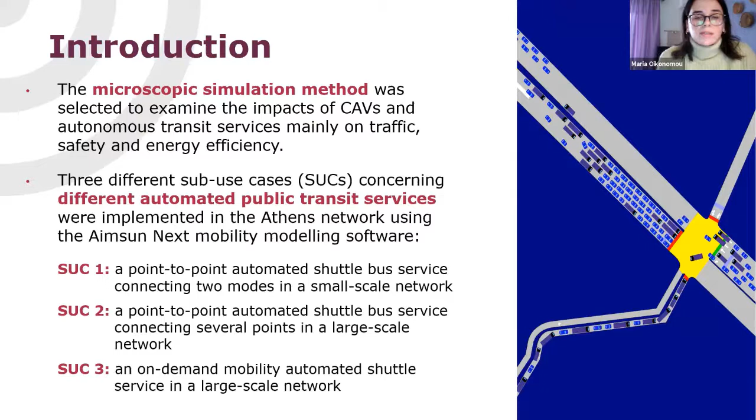The last one was an on-demand mobility automated shuttle service operating in a large-scale network. These sub-use cases were complemented to the existing public transport.

The first network on the right side is the small-scale network, used for the first sub-use case, the point-to-point automated shuttle service. It included approximately 60 centroids, consisted of approximately 150 nodes and 350 road segments.

The second network was the large-scale network, used for the second and third sub-use case. It included approximately 300 centroids and consisted of 1,000 nodes and 2,500 road segments. Regarding the simulated scenarios, for the first sub-use case, a baseline scenario was simulated, which was the no transit service operation scenario.

Also, mixed traffic conditions during peak hour was tested, as well as the existence of a dedicated lane for the service during peak hour.

Also, mixed traffic conditions during peak hour while an incident occurred on the shuttle bus route was simulated for this sub-use case. Regarding the off-peak hour conditions, mixed traffic conditions, as well as the existence of a dedicated lane for the shuttle bus service, were also investigated.

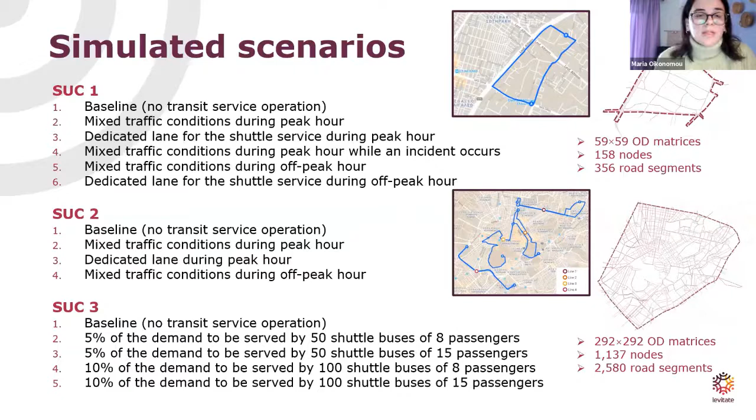Some additional microsimulation specifications were that two main driving profiles were simulated for modeling connected and autonomous vehicles. The first one is the first generation, that is a cautious driving profile. The second is the second generation, that is an aggressive driving profile.

Also, the autonomous shuttle buses for the three services were first generation of connected and autonomous vehicles. Regarding the implementation of them, different market penetration rate scenarios were simulated and are presented in the table on the right side. These scenarios are 8, and the market penetration rate is increased by 20%.

The first one included 100% human-driven vehicles, and the last one 100% of second generation connected autonomous vehicles. Also, the second generation was introduced when the first generation reached 40%.

Regarding the microscopic simulation results, for each impact, a graph was extracted for each simulated scenario for both peak and off-peak hour. Here we have the traffic-related impacts and environmental impacts.

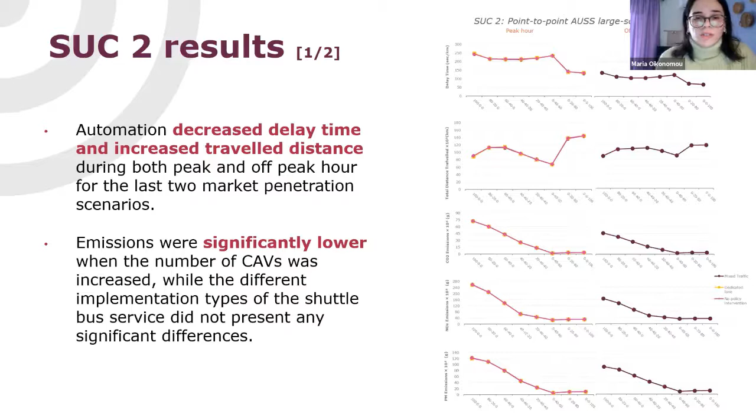Again, traffic emissions were significantly lower for all scenarios, while the different implementations of the service did not present any significant differences. The corresponding crash rate graph showed that none of the scenarios predicted an increase in crash rates, even at low market penetration rate scenarios.

Compared to the baseline, both peak hour scenarios showed the same trend in crash rates. And for the off-peak hour scenario that showed the fewer driven kilometers, the crash rate was higher at all market penetration rates.

Regarding the last sub-use case, the on-demand shuttle bus service, the implementation of the service led to decreased delay times and did not show any significant differences in total distance traveled. Traffic emissions were again significantly lower when the market penetration rates were high, and the different implementation types of the service did not present any significant differences.

Crash rates were reduced for all market penetration rates, and the addition of the service resulted in higher predicted crash rates than the baseline scenario.

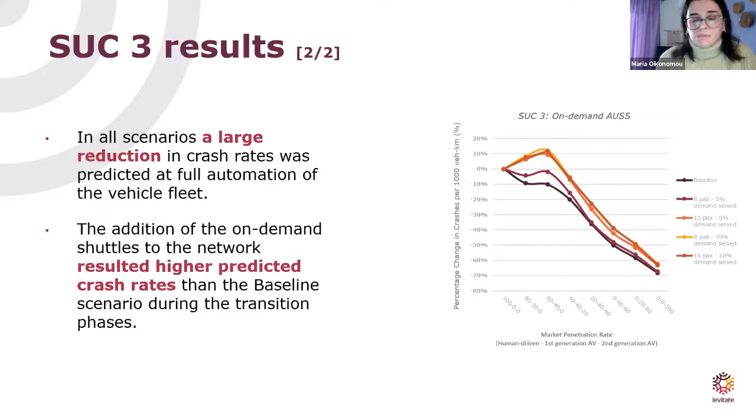To conclude, the point-to-point automated shuttle bus service led to increased delays and total distance traveled, while on the contrary, the on-demand shuttle service decreased the delays and showed constant driven kilometers. In addition, the introduction of the different shuttle bus services did not show significant

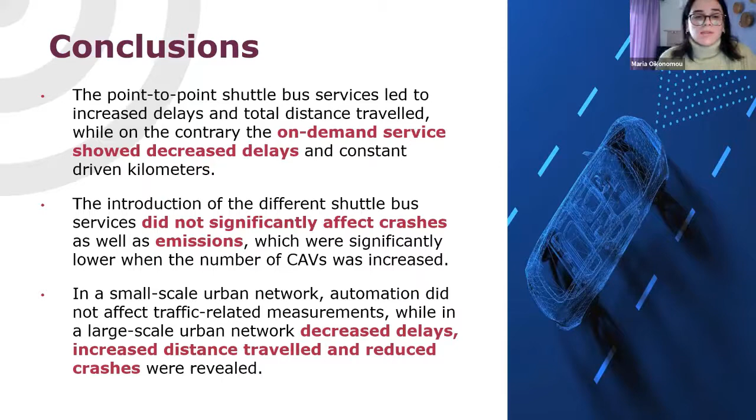differences in crashes as well as in emissions, which were significantly lower when the number of connected autonomous vehicles was increased. Finally, in a small-scale network, automation did not affect traffic-related measurements, while in a large-scale network, decreased delays, increased distance traveled, and reduced crashes were revealed.

Thank you very much.

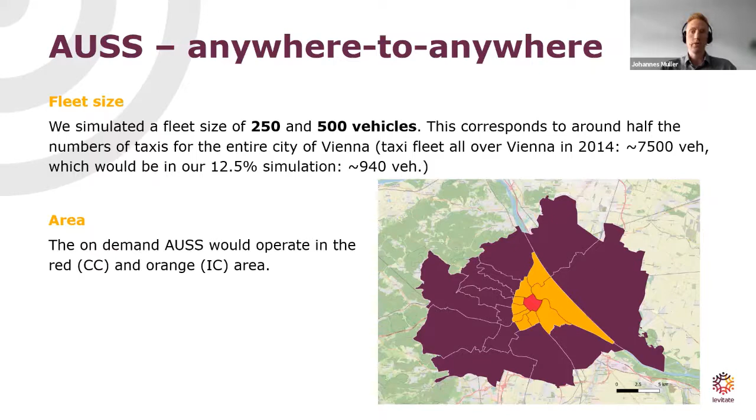And you can basically hop on and hop off at any link in this network in the dedicated area. We have worked with two different fleet sizes. It seems to be a bit small, but regarding the size of the simulated population, which is 12.5%, it actually compares to the current taxi fleet size operating in the whole area of Vienna.

The other scenario is a bit different. We do not focus on the inner city area, but instead go to the suburbs, which is quite uncommon compared to current car sharing services, where operators usually focus on very dense inner city areas. We thought it might be interesting to analyze what happens if we really enforce people using the service in the suburbs, which is why we called it the last mile shuttle.

By this, we ensure that the vehicles are used very wisely, so they are not just used as a simple supplement for urban transport. Really, we can restrict it and enforce more intermodal use with public transport especially.

All these zones usually have a very good public transport hub - an underground station or suburban train station, which operates at least every 10 minutes, let's say. In rush hour, in peak hours, it's usually more.

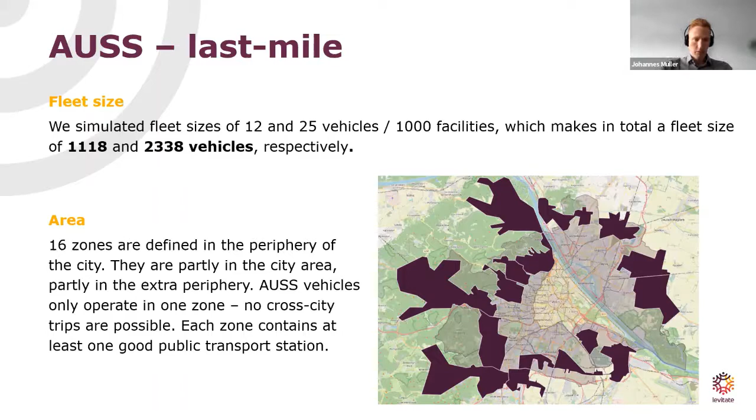For all these zones, we have a different fleet size, which is dependent on the number of facilities. Facilities are places where an agent in the simulation can do an activity. Here we work with a fleet size of 12 or 25 vehicles per 1,000 facilities, resulting in more than 1,000 or more than 2,000 vehicles.

What are the general configurations in the simulation? First, a very important parameter is the value of travel time savings, or the marginal utility of travel time, which needs to be configured. Here we assume, according to literature, that the VTTS of these shuttle services is around 75% of the VTTS of

a car. We also work with different market penetration rates, as Maria has presented, and here we randomly change some of the agents' private cars to an autonomous car, or connected automated vehicle. We work with two generations: the first generation has 80% of the VTTS, and the second generation, like the automated urban shuttle services, has 75% of the VTTS of a car.

We work with slightly different capacities of vehicles. Only 4 persons have space in such a vehicle.

That's because otherwise the simulation is assumed to not work properly, because you need to pick up every person on the way, and a shuttle bus that randomly picks up people would lead to very high detours. It's not reasonable to have such high detours, so we restrict it to a kind of normal car service.

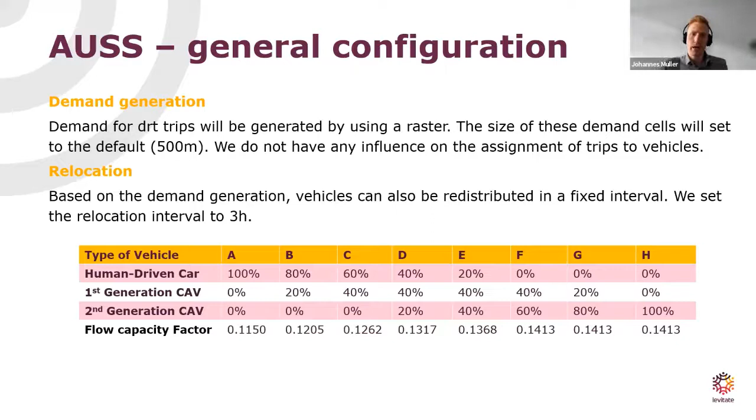The presented impacts will, in this case, be only three: the travel time, the amount of travel, and the modal split. We could also deliver the vehicle utilization rate for the AVs, and certainly emissions, but in this case we referred to the micro simulation. So in the next slides you will see travel time, amount of travel, and modal split.

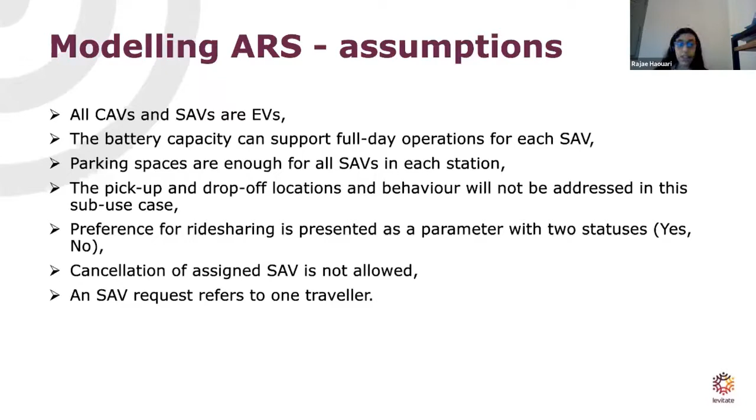Concerning the preference of ride sharing or the willingness to share, we only use a parameter with two states: whether the passenger is willing or not willing to use this sub-use case. Of course, no cancellations are allowed, and the trip request is referred to only one traveler.

As well as the empty distance traveled, and also the behaviors or the way those shared vehicles circulate the network. For example, they can use some secondary or minor roads, causing more congestion.

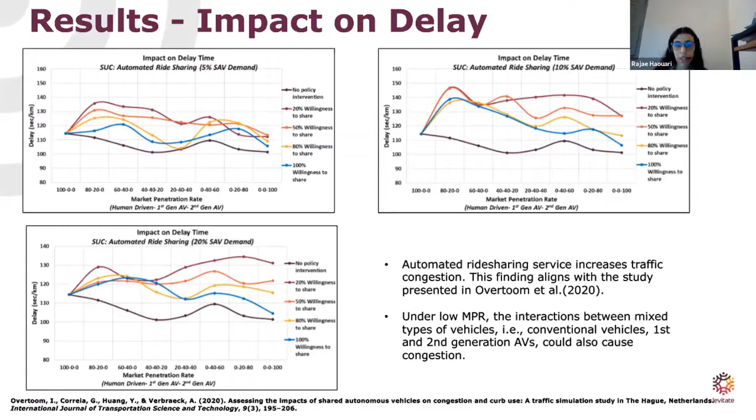As you can see, the results are kind of inconsistent with the market penetration rate, and this could be related to the interaction between the different vehicle types. That means first generation, second generation, and human driven vehicles as well, which could also cause more congestion.

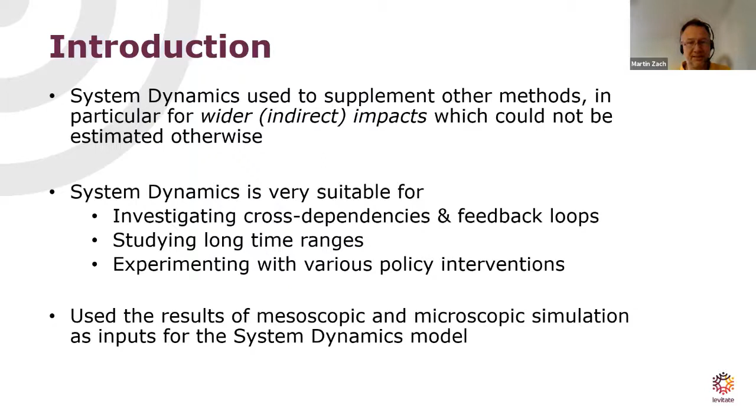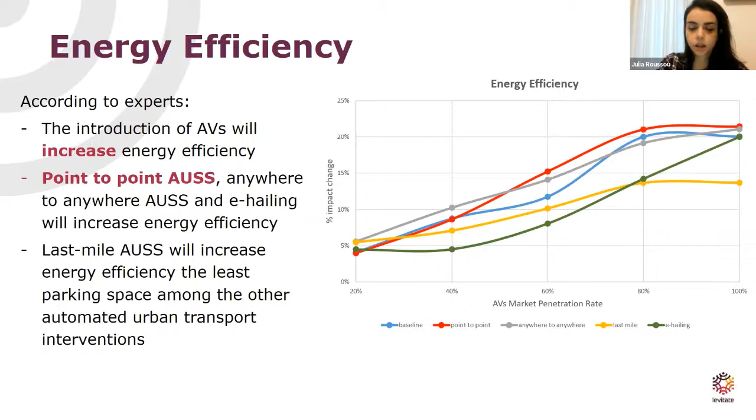In the second round, experts agreed with the first round results, but there were suggestions that the anywhere-to-anywhere automated urban shuttle service and e-hailing will in fact reduce energy efficiency because they will use the roads throughout the entire day. Of course, their suggestions were taken into consideration for the final calculations that will be integrated in the policy support tool.

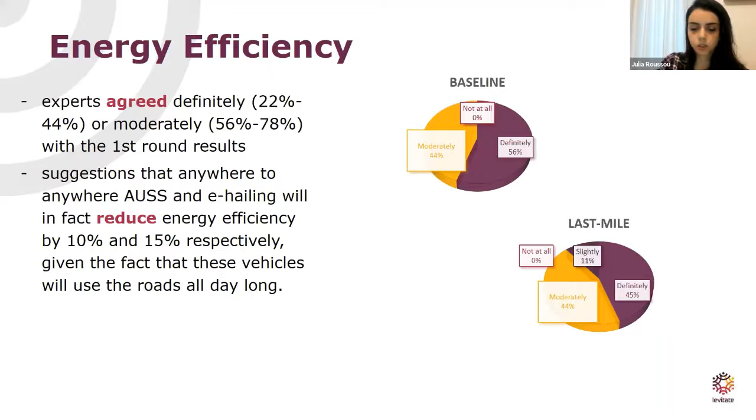Then we have public health, which is defined as a subjective user's rating of public health state related to transport, such as air quality and noise pollution.

The general expert opinion in the first round was that all automated urban transport sub-use cases, including the baseline scenario, will lead to a small improvement on public health, which is also compatible with the microsimulation results for reduced emissions. Point-to-point automated urban shuttle service is the most efficient scenario.

In the second round, experts agreed with the first round results, but suggested maybe that automation could have a negative impact on public health, as they considered that people will tend to use more automated vehicles than active modes of travel, such as walking and cycling.

Finally, the last impact calculated using the Delphi method was accessibility in transport, which is the degree to which transport services are used by socially disadvantaged and vulnerable groups, including people with disabilities. As we can see, the baseline scenario is the most efficient one and has the biggest positive impact on accessibility in transport.

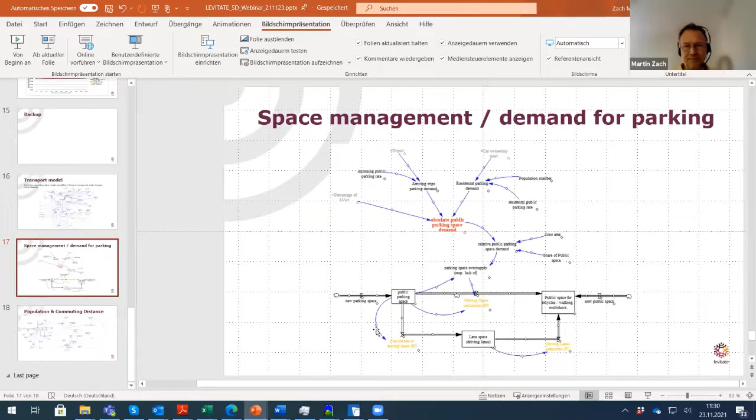Okay. There is a question for the simulation modeling, perhaps this is for Maria again, by Albert.

For the microscopic simulation method, no, potential long-term residential relocation was not taken into account. Basically, the simulated scenarios differed only in the market penetration rate of connected and autonomous vehicles.

If I can just add to this, what I stated in my introduction was that especially such aspects would be good to build on top of the simulation results and feed this into a system dynamics model. But at least in my understanding, the microscopic simulation method and even the mesoscopic simulation method would be a bit limited to consider such effects.

That's true. As Maria said, in the mesoscopic simulation it was just considered by the reduced VTTS, so that's kind of what you mentioned with the lower burden of being stuck behind the wheel. It's not actually related directly to congestion time, but more to sitting behind the wheel of an automated vehicle. That has been considered, but we have not considered changes in the population in the mesoscopic simulation. So the agents were doing the same activity plan across the different market penetration rates.